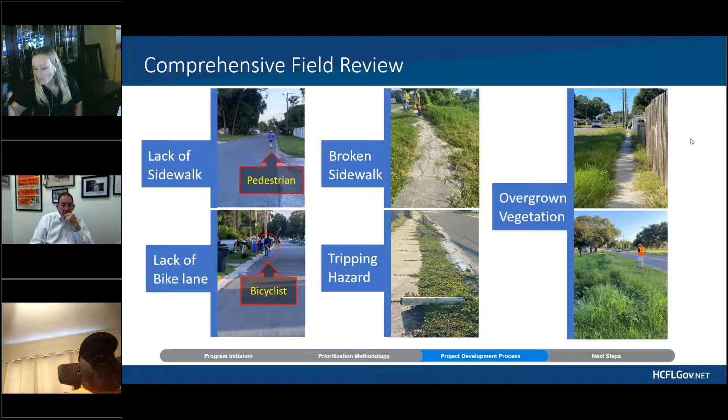After this advisory committee meeting, a comprehensive field review is performed on the identified routes with the participation of various engineering disciplines from the county and the consultant. The goal of this comprehensive field review is to identify safety needs and locations and to recommend specific improvements.

Once these improvements or recommendations are identified, they're grouped into 3 tiers. Tier 1 are low complexity, easy to implement improvements that could be done in less than a year.

Please, at this time, I'd like you to know that the timelines I am providing are based on funds being readily available for the project. If no funding is available, additional time will need to be added accordingly. And we know our surtax didn't pass, so this is going to be a challenge raising funds, but it's totally worth it.

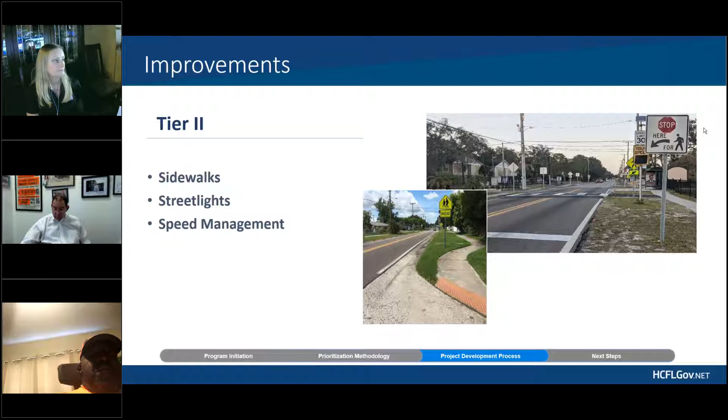Tier 2 improvements are of moderate complexity with minor coordination and require some level of design. These type of improvements can take up to 3 years.

And Tier 3 improvements are of high complexity with major coordination and major impacts required in higher level of design. These improvements will take more than 3 years.

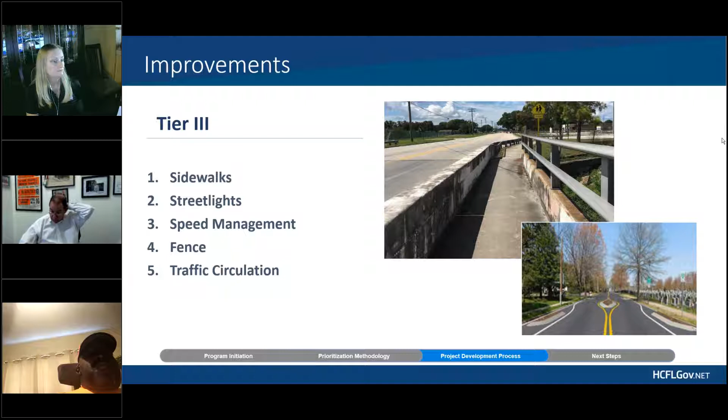After all this work is done, it is time to reach out to our community again. This time, the main goal for the outreach is to include the entire community, the residents, the school, the parents, the community groups, everyone that is going to be impacted by this or benefit by this project.

At this event, we share and inform about the proposed improvements and also ask and inquire for additional input on the ongoing project.

The community engagement phase 2 for our first 3 schools was done virtually this December, and I'd like to take this opportunity and thank the MPO and again Matthew, Amber, and their group for the participation and help with this. It was amazing. Thank you.

Now, this flow chart shows a summary of the different stages it takes to implement this new part of the school route safety program. And the green arrow shows where we have been, the orange shows what we are doing right now, and the blue one shows what is coming.

Now, we already went through what has been done up to date.

Where are we now? Currently, we are finalizing the project development process for the first 3 schools—remember, those were Little, Pierce, and Alexander. AECOM is developing tier 1, 2, and 3 preliminary plans and cost estimating, along with a feasibility report. All these tasks are expected to be finalized by mid-April.

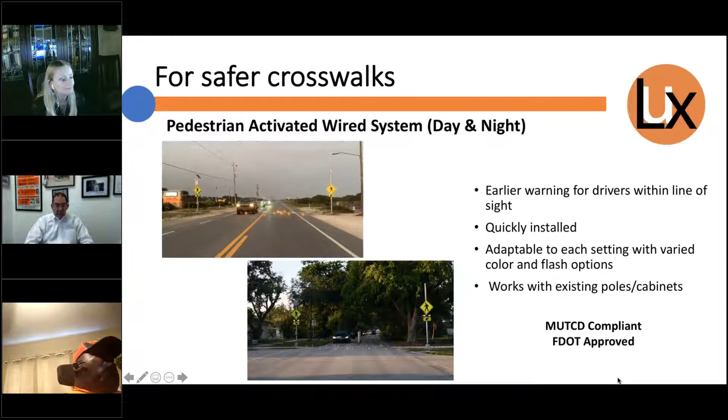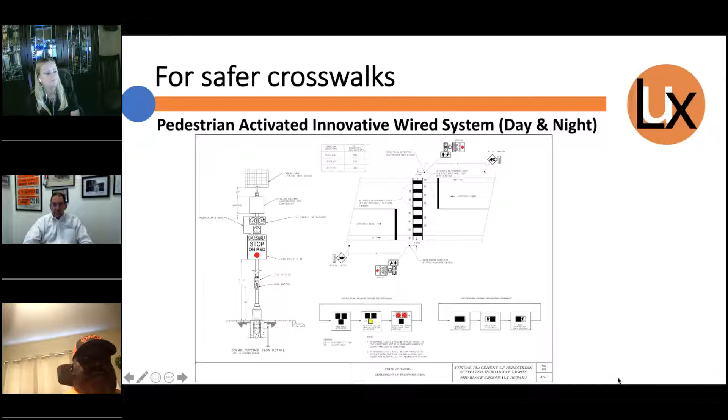This is another application we are working on with FDOT, requesting FHWA approval, to add a red steady application in combination with signals or mid-block crosswalks, like a Hawk system. That's one of the applications we're looking at right now with FDOT, having applied for a request to experiment with FHWA.

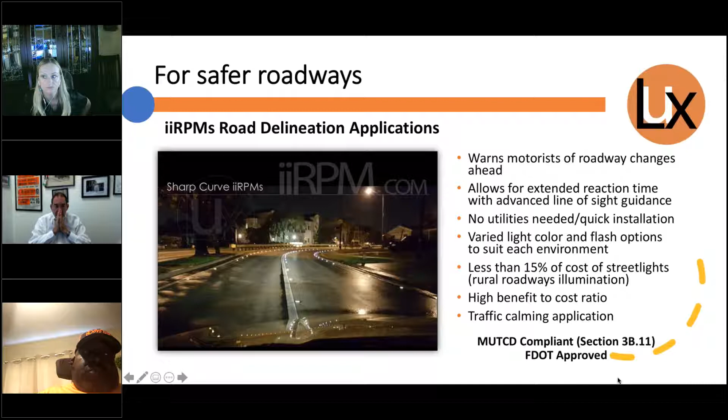This is an application, the first one of its kind right now. We installed this on the Florida Turnpike, at mile marker 166, north of Fort Pierce. There were major roadway departure crashes at that location.

As you can see in this video, we're approaching from half a mile, traveling at 70 miles per hour on the Turnpike without the use of our headlights. This is in essence almost like a runway, very effective for guiding drivers through that curve. Keep in mind this is a very dark highway, and even when it's raining at nighttime, the visibility has been incredible. Many people commented how easy it is for them to navigate through that curve.

Wrong way crashes have been a major problem for us to deal with. Our approach is a little bit different than what's conventionally been used. As you can see in this picture, the confusion is that the driver can't tell the entrance from the exit due to the close proximity of the entrance and exit ramps. The red is obviously the wrong way application.

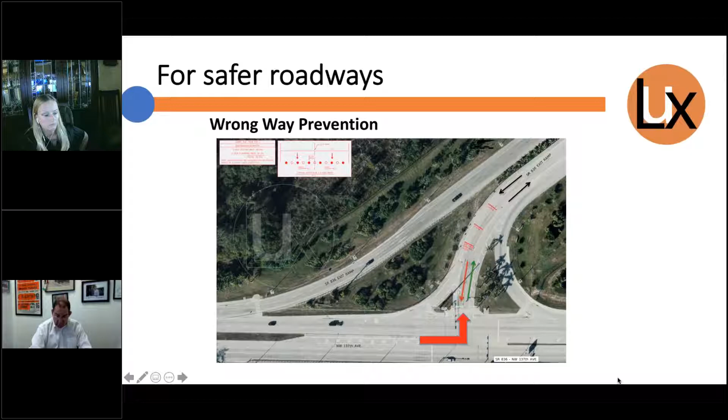What we've done is applied an application that is passive, meaning the lights are already active all night long, steady red, so they can see this is a gate that they cannot enter, just like in this picture. This is clear to a driver, it's a wrong way application, so it's active all night long.

If we need to communicate with the driver to activate after they enter the zone, we can flash at them at that time. But this, at least, will be able to distinguish entrance from exit. This is a very effective message for distracted, aging, or impaired drivers to see the difference between entrance and exit before they enter the zone.

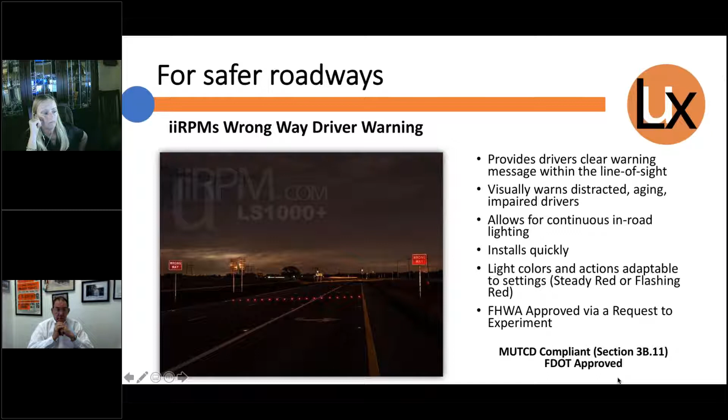We placed about 5 lights inside each lane, and it looks just like a gate. If you go in the right way, you will see absolutely nothing because you drive on it, it looks just like a normal roadway. And if you go in the wrong way, you will see it from 1,000 feet, very easy, with that red gate, as you can see in that picture.

Roundabouts are an amazing safety tool, but we still have many conditions where people go through the roundabouts and hit the structures. As you can see, we're guiding the driver through the roundabout, and also showing them this is the roundabout area with a yellow light at the end of it.

There are many locations with medians and traffic separators that you really can't see at nighttime, requiring constant maintenance. This way we can highlight them to create better visibility.

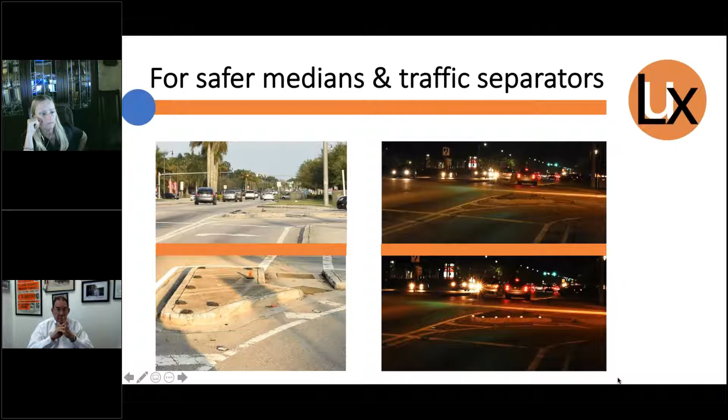Speed humps and speed tables, as you can imagine, are also hard to see at nighttime and need constant repainting. This way we'll be able to provide better guidance for the driver to see it from a distance. The applications for in-road lights are endless. Again, the focus is to provide a message right there between the headlights.

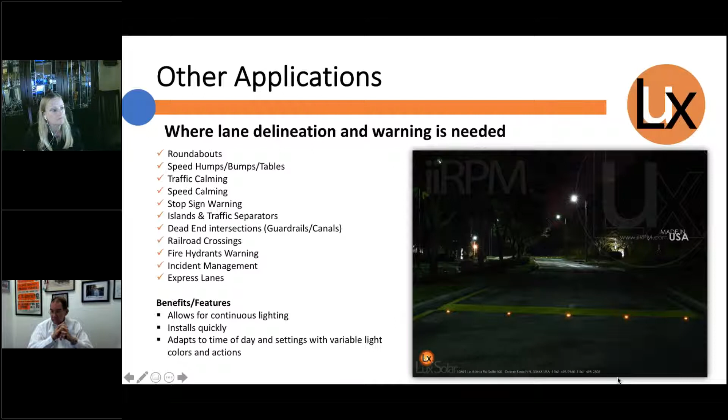We had collective efforts between the state, FDOT, and many construction companies and engineers over 6 years of research and development to come up with a product that really fits our needs. The objective was to provide a product that will be reliable, which is number one, and number two, ease of maintenance and replacement. That's what I'm going to show you through the process of what takes place.

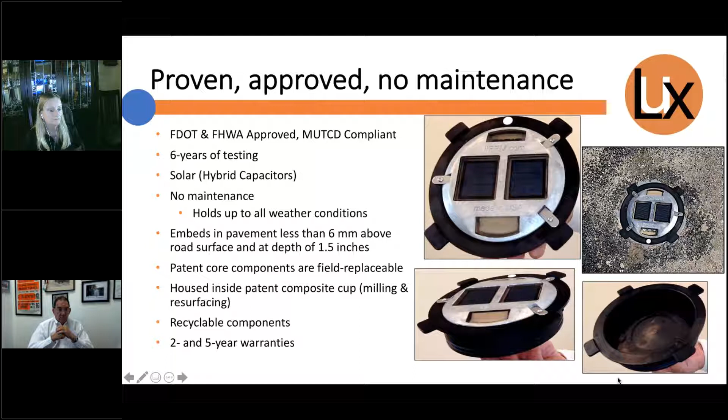This picture shows the solar unit that's embedded in the roadway. The black cup stays in the pavement, and the unit can be ejected out at that time. Now I'll show you how we can do it for ease of maintenance.

For reliability, we've been working with Ohio DOT, and I want to show you this video. After half an hour of installation, we hit that unit like 8 times in each direction. As you can see, it sparks. That's how resilient the unit has to be in order to withstand those applications. So the electronics are embedded in the roadway and protected.

We are proud of many studies that have shown in-road lights are really an effective tool. But 2 of our studies that are most relevant to us involve the Florida Turnpike. We saw a reduction in speeds over 70 miles per hour from 58% to 38%. That is really impressive for us. We did a before and after study.

Another project took place in Jacksonville, on an S-curve. We highlighted the curve. In the 5 years before we installed our lights, there were a total of 56 nighttime crashes. In the 2 years after we installed our lights, there was only 1 nighttime crash. That was really a great eye-opener for us to know we are on the right track.

There are many letters of support and recommendations from many people, including bicycle associations, requesting the need for in-road lights because it's safe for them. It's embedded in the roadway, less than a quarter of an inch, very easy for them to travel on it without feeling any issues.

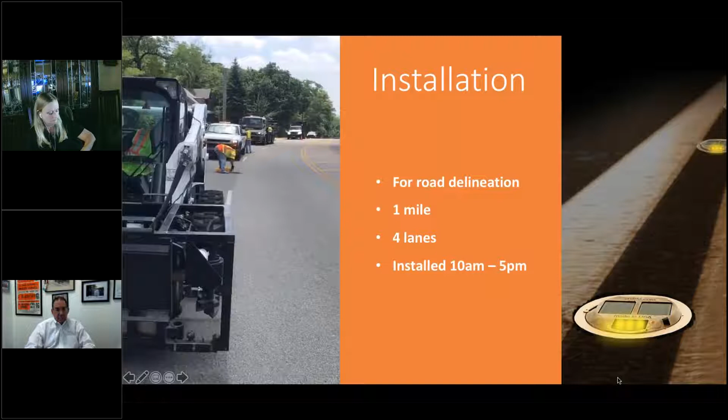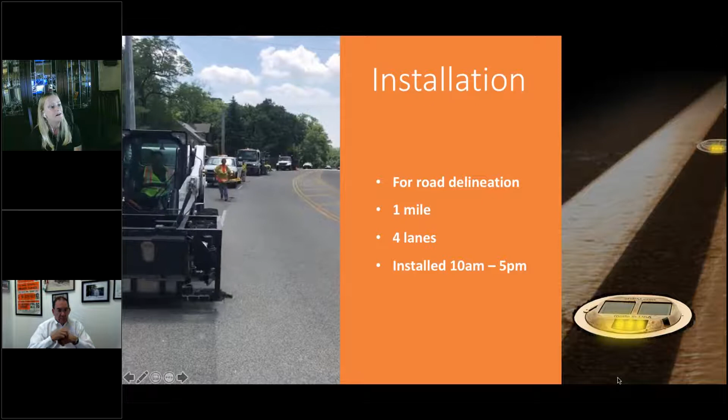Installation, we have to invest in installation. It is very important. This is a drilling machine attached to a Bobcat that we developed to make it easy. This is actual live footage. In 30 seconds, we'll be able to drill the hole, and then the material is pulverized. One person cleans it, and then the truck behind applies the epoxy material where they'll be able to place the light.

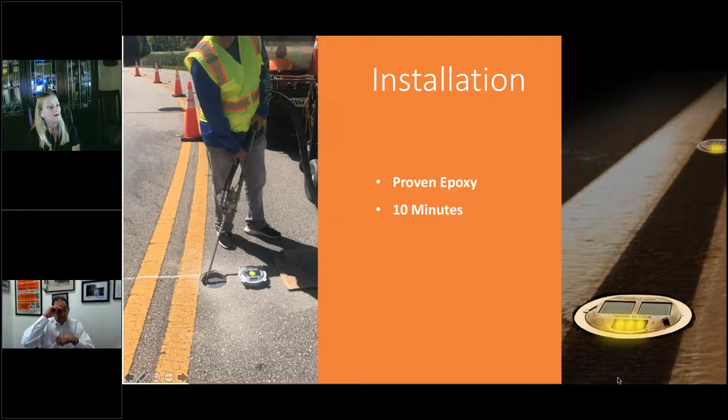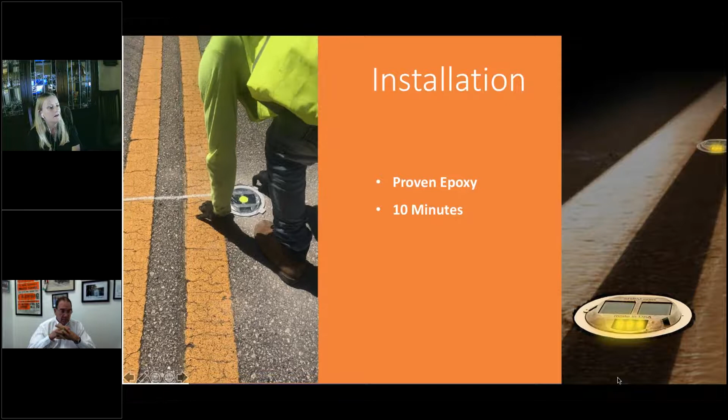The epoxy is an important element. It is the same epoxy used for snow plowable RPMs up north. It's a 2-part epoxy that bonds very well with the pavement. It allows sufficient time for the installer to put the unit, level it, and then after 10 minutes you're ready to drive on it.

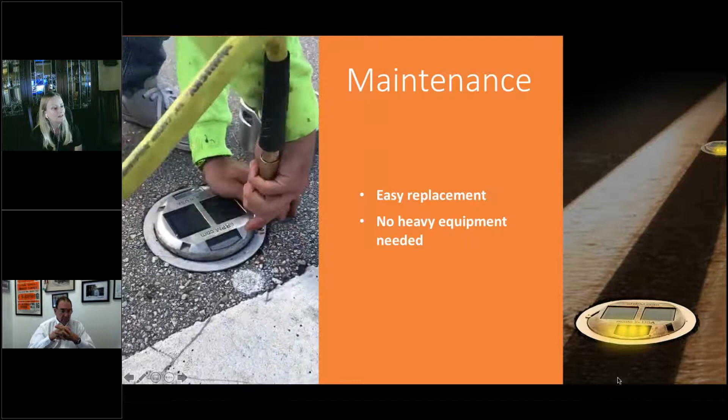Maintenance - this is the beauty of it. To maintain the unit if needed, you eject it by air pressure and take it out, and then the cup stays in there, like for manual resurfacing or other issues. Then you come back, press a new cup, and put the unit back in there.

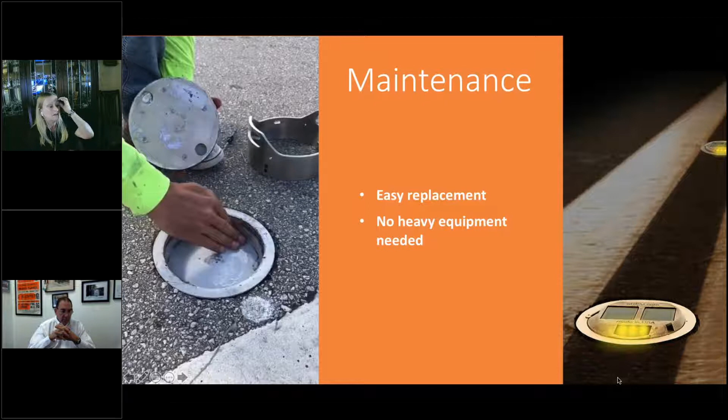There are many areas, like we talked about, where we can make a difference. Obviously, safety is a team effort. It requires all of us to work together to achieve our goal. Many areas can be targeted, and our goal is your goal, to be able to provide a safety solution. With that, I'll be happy to take any questions.

Are there any questions?

Yes, I have a question - this is Larry Josephson. I think those are great treatments to use to highlight crosswalks and so forth. One thing that struck my attention was at the very end, you said you can pop the unit out of the ground for resurfacing and the cup remains in the ground. But we typically, when we resurface, mill the pavement up to a couple inches sometimes, so those cups in the ground will have to be replaced. Do you have a cost for those replacements? I mean, would all of those cups have to be replaced? Do you have a procedure for that, because those would be a throwaway? You are definitely correct. For example, we had a roundabout down in Miami Gardens

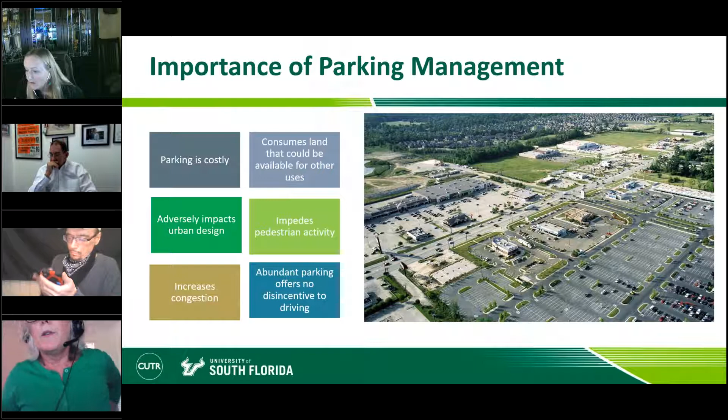Why parking management? There are a lot of different impacts of surface parking. It's expensive, costs about $5,000 or more for a surface lot and $21,000 a space for a garage space, representing about 10% of your building development costs. It's particularly costly in areas with high land values, and can reduce profit for each unit of reduced parking requirement. It also adds to the cost of a residential unit, anywhere from 15 to 30%.

Providing a lot of parking to accommodate peak demand also consumes a lot of land for other more valuable uses. It reduces densities and spreads development out over a larger area, as you can see in this image with these large surface parking areas, which make it longer to walk to where you need to go and hinders use of public transit because you're a pedestrian at either end.

Cheap and convenient off-street parking offers no disincentive to driving. On the contrary, it promotes increased use of vehicles, which leads eventually to more traffic congestion, air pollution, and poor public health. It certainly increases obesity, as we've seen in our country. It's something of a cycle, because that traffic congestion then results in wider streets, bigger intersections, and even higher parking requirements.

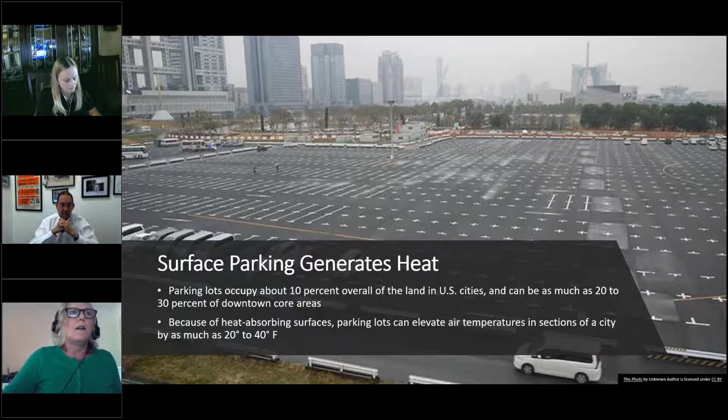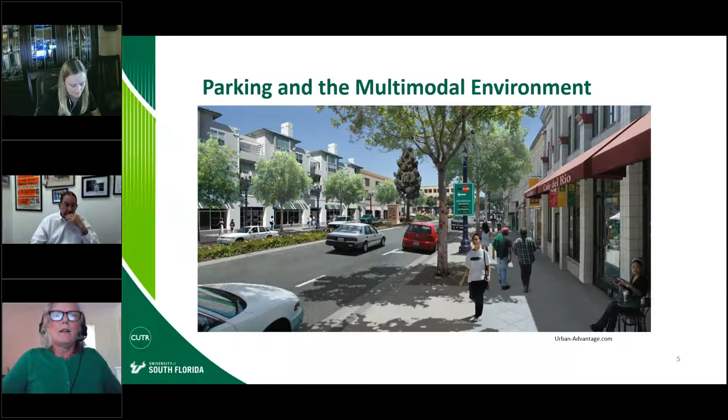There was a study by the National Association of City Transportation Officials, NACTO. It found that a metered parking space might only serve 15 vehicles a day, but a bus stop can serve 1,000 riders. And if you add car share options into these areas, one Zipcar might reduce up to 13 personally owned vehicles in denser urban areas. So adding that density and creating that street wall in an active urban core area involves managing parking and providing different ways to access those areas.

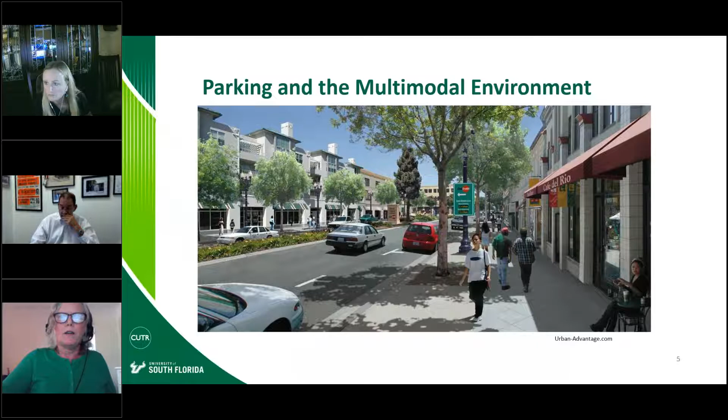Parking management is a whole host of techniques that look at more efficient use of parking resources. There's pricing, like cash-out options, to incentivize different behaviors — your employer can allow you to accept a cash payment in exchange for giving up a parking space — or different durations of parking, long-term versus short-term parking rates, and so forth. And providing alternatives: encouraging modes that decrease the need for parking, or offering bike parking, van pool subsidies, different types of options, as well as perhaps remote parking with shuttle services.

You see that in airports, universities, beach areas. Some popular regulatory methods of parking management strategies are parking maximums, shared use parking, and increasing the capacity of existing parking by regulating length of stay. We're going to talk about a few of these in a moment.

And then just convenience — how convenient is it to get from one to another? You get to your location and find that parking space. Are there smart meters and other methods that tell you that parking is available in the location you're headed to?

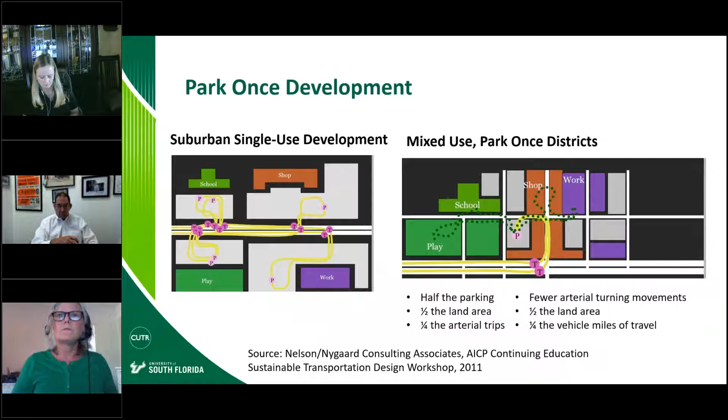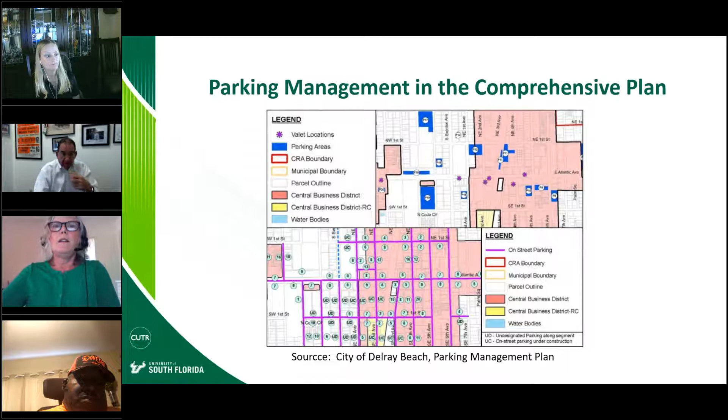So that is it for me, a quick overview of parking management. I will stop sharing my screen here.

All right, you should have control, Karen. Okay. Let's see, so how do I pull up the presentation? Do you have it up on your screen and ready to go? I do. Okay, you just have to accept the presenter thing that I just sent you. I did share that. We're not seeing your thing. Jason, is there another step she has to do? Under the sharing, no, we can see it now, I think. You can see it? Should be the front screen. Oh yeah, downtown. I'm seeing it. Okay, sorry, I have too many things open, I'm trying to keep going. Yeah, I see it, it's beautiful. Great, okay, thank you, all right.

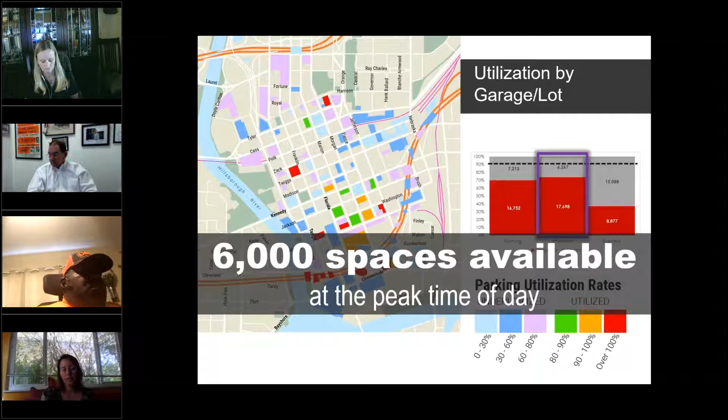So what we found from our occupancy counts is that even at the busiest time of the day, the peak demand, we still had 6,000 parking spaces available. That doesn't necessarily mean that all those parking spaces are available where people want them; it really leads to the fact that we need shared parking. Shared parking is going to be one of our best solutions, which is surprisingly hard. But right now, the pricing's not set up to make rational choices.

Parking was always kind of a political issue, as Councilmember Citro can assure you. The city hadn't really raised parking prices since 2004. It was ironically one of the first things I worked on in my job—I've been here for quite a while. It just became kind of a political issue because nobody wants to be the one to raise parking prices. So the private sector was charging about double what the city was charging, even though the city's facilities for the most part are in kind of the juiciest parts of the central business district or wherever people want to be.

We also found, and this has been corrected now, that our on-street parking was oftentimes cheaper than our off-street parking. Your on-street parking is obviously going to be your most convenient spaces that are meant to have constant turnover. We also did not charge for those spaces on nights and weekends—that has since been altered as of January 1st of this year. So this parking plan will take many years, I think, to implement, but we're definitely heading in the right direction.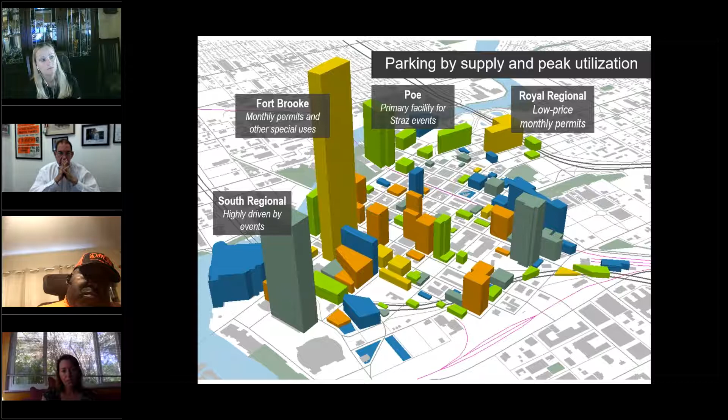One of our recommendations was to start managing the wait list. So now the city limits you to 2. And then I believe at the end of your year on the wait list, there will be a small fee to continue on that wait list, so we can really kind of gauge what the market is.

But you can also observe that we have small block sizes in our downtown, and you can really walk just about anywhere in 10 to 12 minutes. So even though we might call it remote parking or perimeter parking, I don't think any of it is— all of it seems to be within a reasonable walk distance.

Customers have no incentive to ask for anything different. We are set up totally for monthly parking.

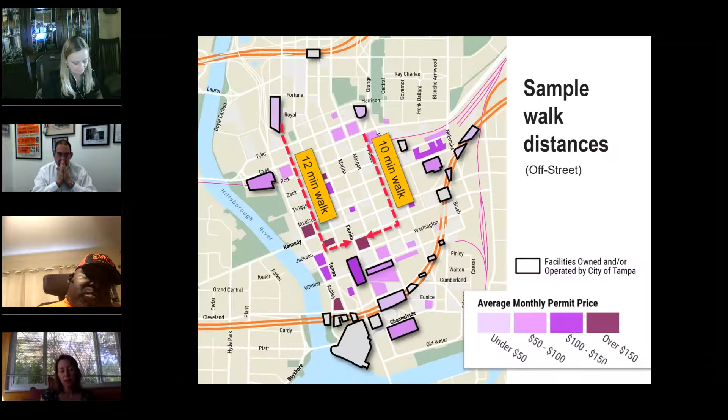So we think that people would be willing to walk if the price was right for them, which is why we also thought it was important to maintain that variety of prices.

And by the way, this observation here, it was very true. We did lots of different stakeholder groups as part of this process. One of them was the parking operators. They certainly had a key role to play in this, and they do maintain, I think, like 2/3 of the parking inventory. This talks a little bit to what Christine was saying about unbundling the rent from the parking.

It's surprising how hard some of this is. It feels like it would be a no-brainer to me, but I guess the way that a lot of these apartment complexes that have already been built are set up, the financial lending team isn't comfortable with not including the parking space with the unit costs, which is a shame. So hopefully this will be a good opportunity for us moving forward.

But you can see that parking absolutely impacts affordability. We do have one residential building—it was an adaptive reuse of an old commercial office building right there on Madison Street. It's called 220 Madison. They were really the first to try to develop with no parking, because there wasn't already any parking there.

So they ended up going after a model that has kind of a shared space for college students, and it's a very reasonable walk to the University of Tampa. Unfortunately, the developer felt that they needed to still provide a shuttle, even though it's a 10-minute walk to campus. I believe that shuttle is very well used.

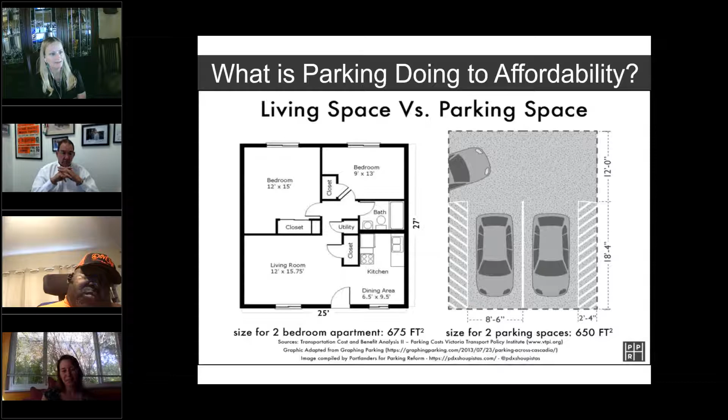So we try to do consensus information building at the beginning. We continue to do that. Thankfully, Mayor Castor and her whole team have been very willing and able partners in this.

There's a whole laundry list of what's coming next. Some of the strategies Christine mentioned, such as curbside management. The city ended up hiring our parking consultant to create a curbside management plan. I hope to see that roll out very soon.

I mentioned that some on-street policies have changed. So now all meters in our downtown are enforced till midnight. There was a relaxation of that on Sunday mornings from about 8 a.m. to 2 p.m. to handle some of that crowd. But otherwise, you're going to see enforcement of the meters in all of downtown, potentially moving into Tampa Heights.